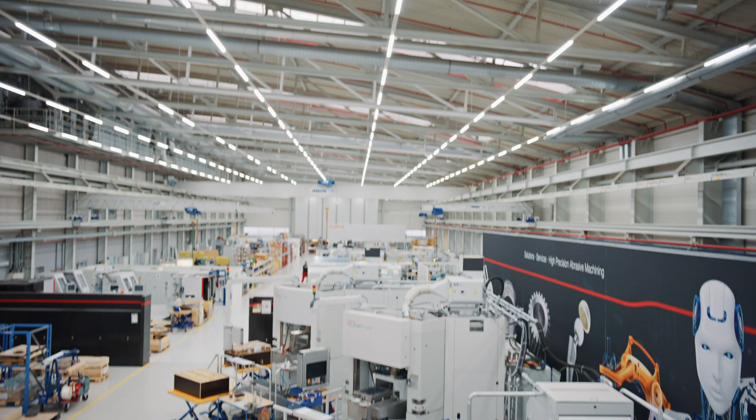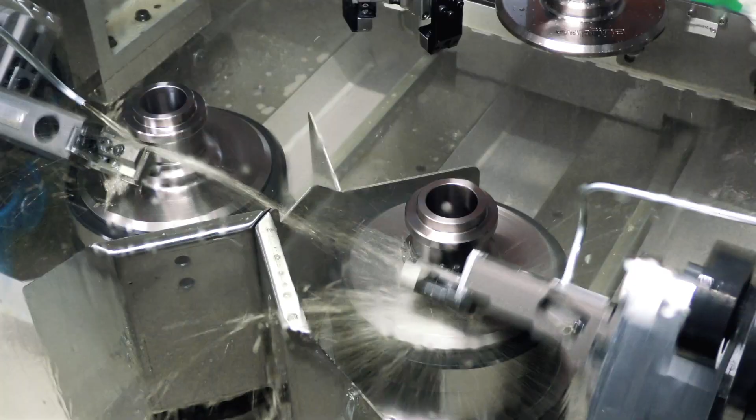Supfina Grieshaber, with locations in Germany, the USA, and China, is among the world's leading manufacturers of surface finishing systems. As system suppliers, we offer complete solutions from a single source, ranging from super finishing to automation, tailored for industries such as automotive and bearings.

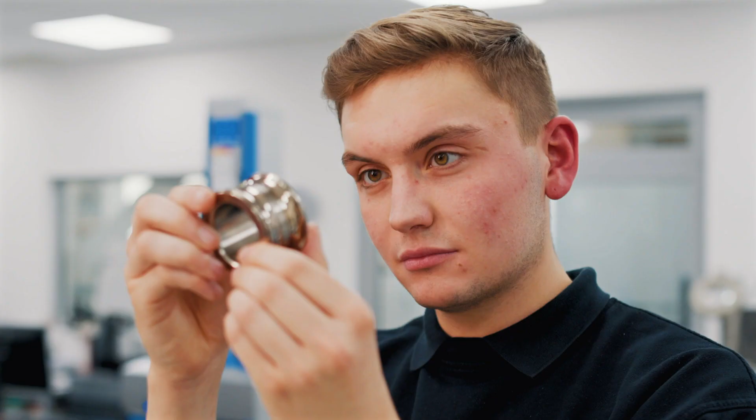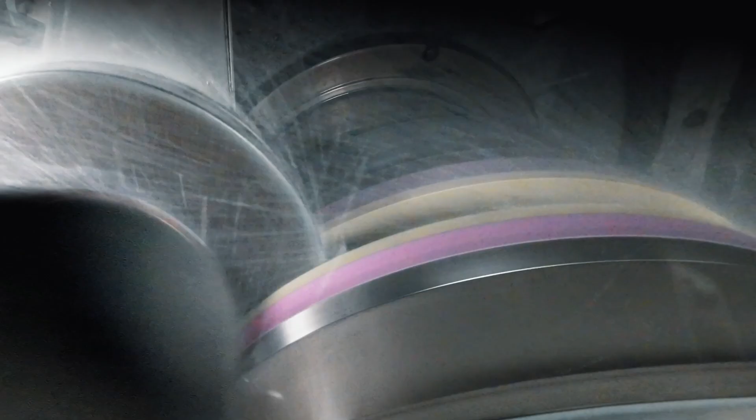Flexibility, reliability, and the highest processing quality are our focus in our latest development. The Supfina Planet BD for manufacturing coated brake discs sets the benchmark for reducing fine dust emissions in the braking systems of all vehicles.

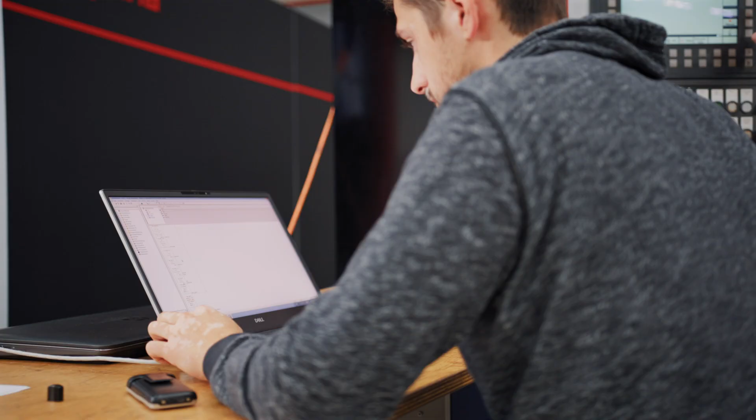Data and technology are increasingly important today, and companies like Supfina must be able to effectively use and integrate this data. Siemens supports us as a reliable long-term partner, providing hardware, software, consultation, and expertise.

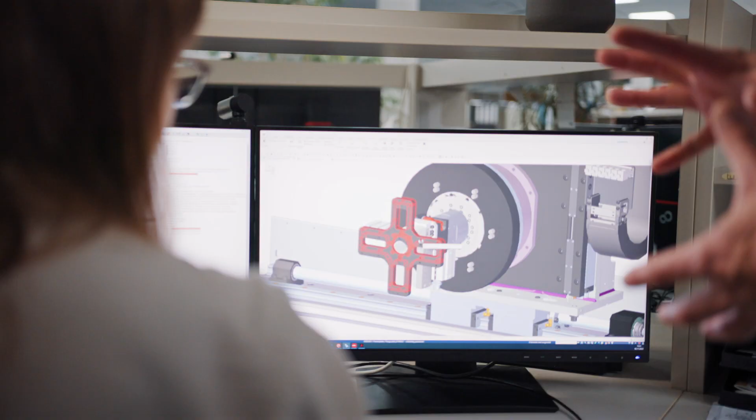For Supfina, it's important to react flexibly and swiftly to customer requests. New and optimized ideas can be evaluated and visualized early on. This allows rapid data provision across all company sectors.

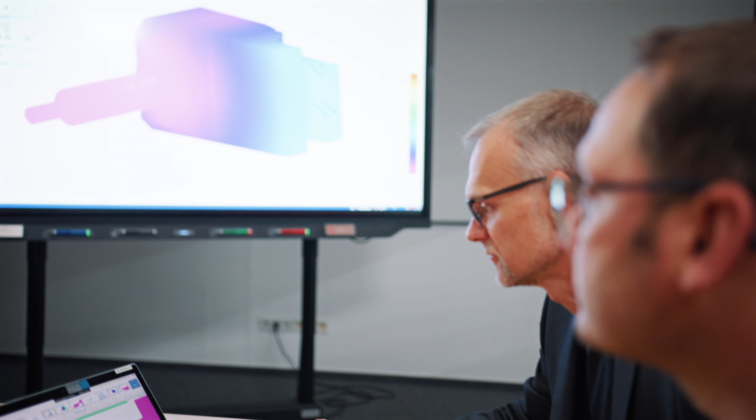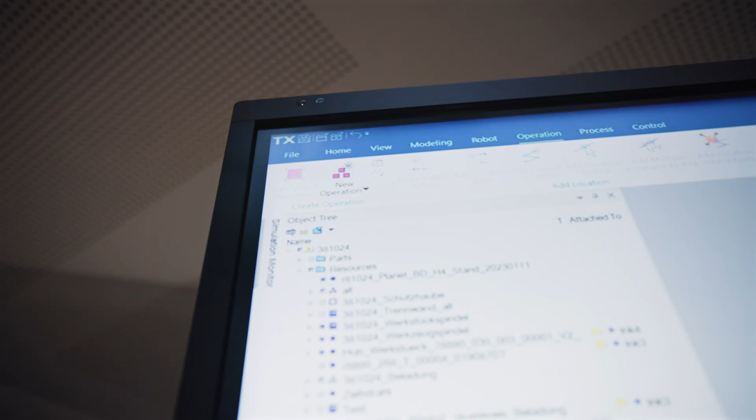Solid Edge synchronous technology enables efficient concept generation and implementation of changes. With Solid Edge CAM Pro, we achieve swift and smooth transitions to manufacturing, especially for complex parts based on 5-axis machining.

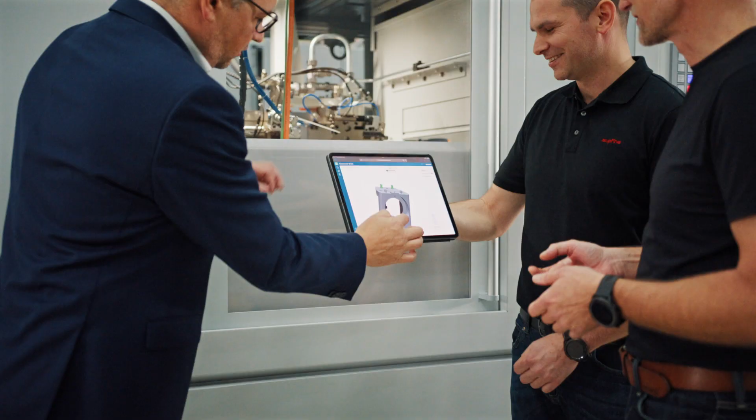Teamcenter Share provides us with a secure, global communication tool for interacting with our customers, partners, and suppliers. Even our teams in the USA, China, and Germany are efficiently interconnected via cloud-based systems.

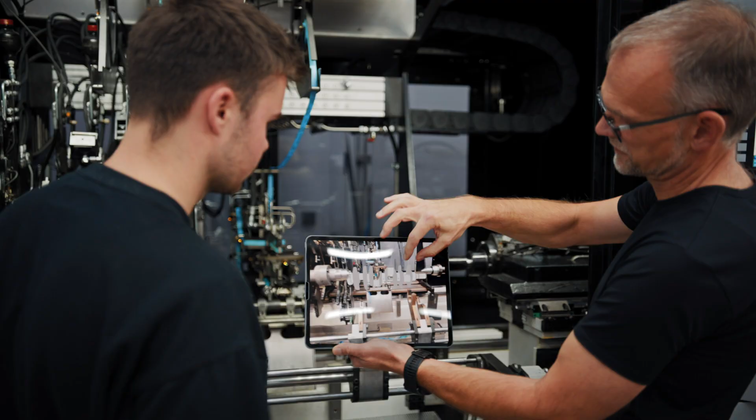Digital prototypes can be visualized in a real environment with augmented reality. Tecnomatix Process Simulate allows us to align digital automation concepts with our customers and verify expected cycle times early.

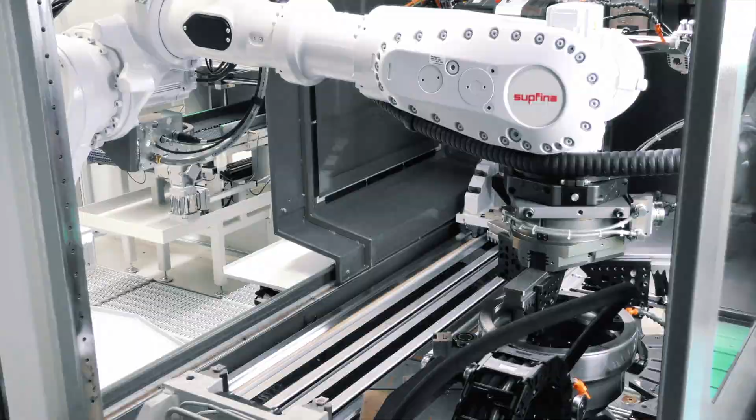Since 2000, Siemens experts have been indispensable in discussions about requirements and technical IT matters. Their reliability and collaboration are crucial for our path to success.